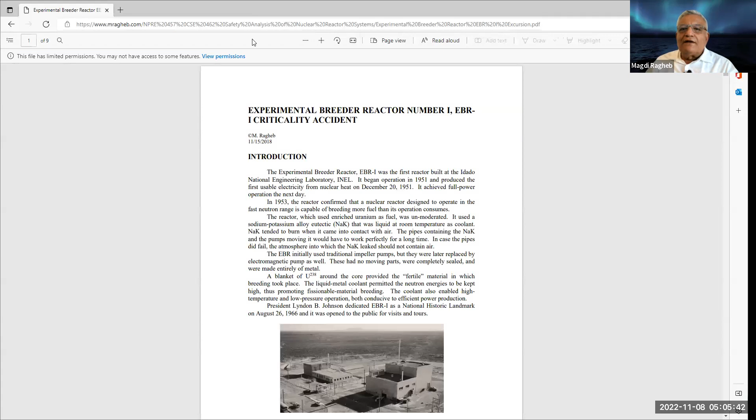And the first accident that the nuclear industry had to deal with was the Experimental Breeder Reactor Number 1. So this is the first description. Actually, that accident that happened in the Experimental Breeder Reactor Number 1 was intentional, because they generated the accident intentionally so that they could learn about how a fast reactor would operate. And historically, the interesting thing is that the Experimental Breeder Reactor Number 1 was the first reactor to operate in the United States. It was built in the desert around Idaho Falls.

Our TA was at Idaho Falls last summer. Idaho Falls is the Idaho National Engineering Laboratory. It is a lab in charge of the safety aspects of nuclear, not just operating power plants, but also naval reactors. So they run experiments in the desert there of Idaho. Right now, that EBR-1 reactor is a museum that you could visit on your way out west, maybe on a trip over the summer. Don't travel in that area during the winter. It's a very, very dangerous area in that case.

It produced electrical power for the first time from nuclear energy on December 20th, 1951. And in 1953, it confirmed that a reactor built to operate in the fast neutron range is capable of breeding more fuel than its operation consumes.

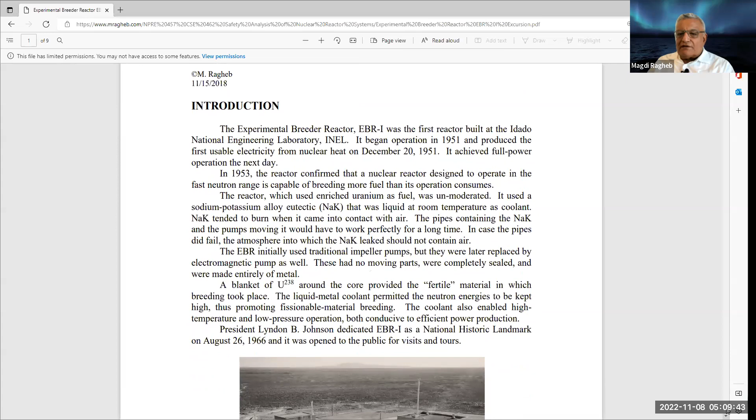Why a liquid metal? Because when you use a liquid metal, the moderation of the neutrons is not as efficient as when you use water, like in light water reactors, PWR and BWR, or in graphite, carbon-12. Sodium and potassium are not very good moderators, so the neutrons remain fast, around the kilo electron volt range. They're born at 2 million electron volts. In thermal reactors — light water cooled, heavy water cooled, or graphite moderated — we slow their energy all the way down to 0.025 electron volt.

Modern liquid metal fast breeder reactors have been designed to use sodium as a coolant. Sodium is highly reactive with air and with water. If you have any contact between the coolant water and the sodium, you get a fire — same as lithium in lithium-ion batteries causing fires in existing electric vehicles.

So in that case, they use the eutectic. What is a eutectic? It's an alloy of one or two elements that has the lowest melting temperature. Whereas sodium at room temperature would be a solid, and you have to heat it to turn it into a liquid, the sodium-potassium alloy is liquid at room temperature as a coolant.

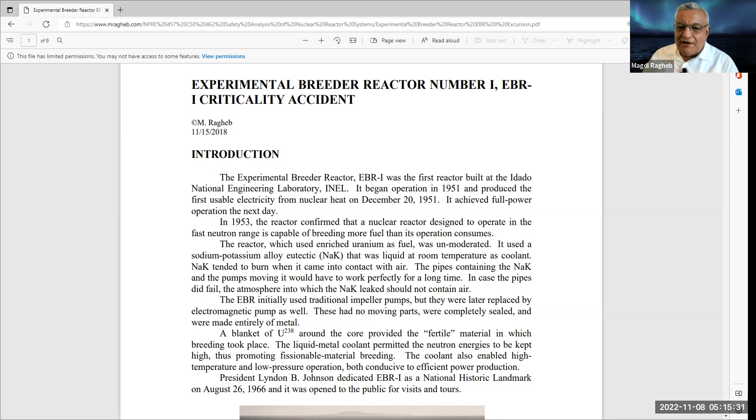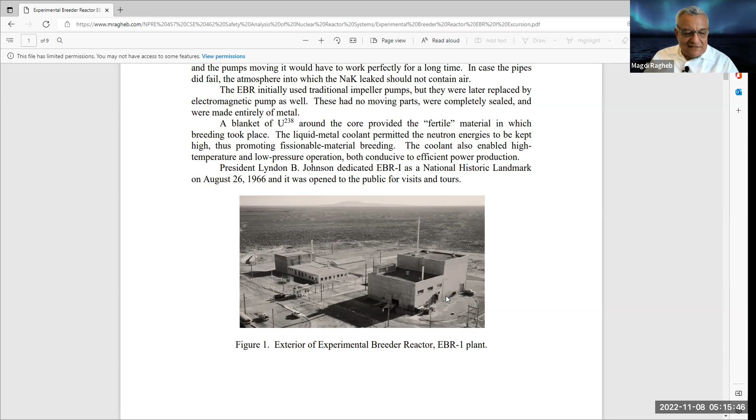It also used magnetohydrodynamic pumps. Here is a picture of the EBR1 plant in the desert of Idaho. You can see it's out in a big desert. On your way west, it's a museum now, no longer operational, but it proved for the first time that you can produce energy from nuclear processes. The first nuclear energy produced in the United States was done here. They lit up light bulbs from the electricity produced by the EBR1 plant.

The Experimental Breeder Reactor Number 1 at Idaho Falls was followed by another reactor that used sodium as a coolant instead of the sodium-potassium eutectic, aptly named EBR2, Experimental Breeder Reactor Number 2. It was a fast reactor that operated successfully for 20 years before being retired, and it supplied the city of Idaho Falls with nuclear electricity. It was very well designed, and I had the pleasure of walking on top of it while it was in operation, which means it was very well shielded.

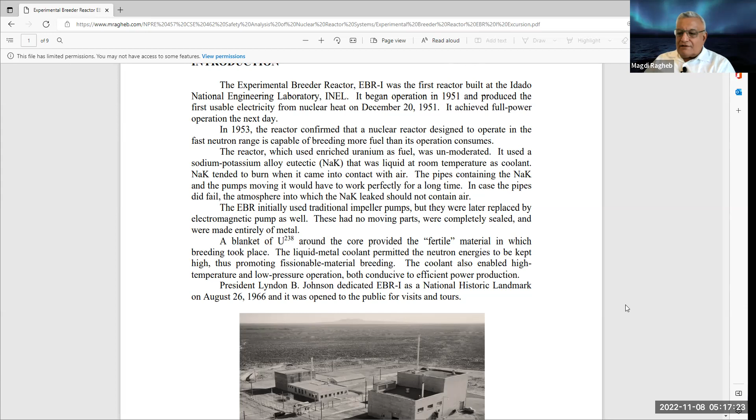Nevertheless, that was the first reactor to produce nuclear energy in the United States — not in the world, because the British had run a reactor before that at Calder Hall. The first nuclear energy was produced in the UK, not the United States, but EBR1 was the second. It was declared a National Historic Landmark in 1966 and is open for public visits.

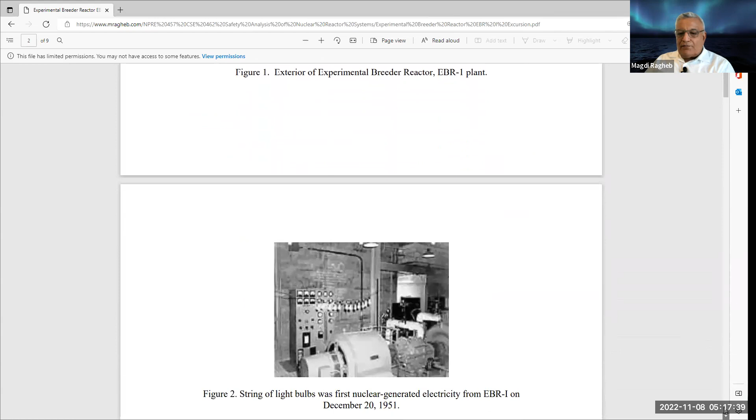The reactor was used to explore what happens when there is a transient or an increase in the power of a fast reactor. Let me quickly show you how that reactor looked.

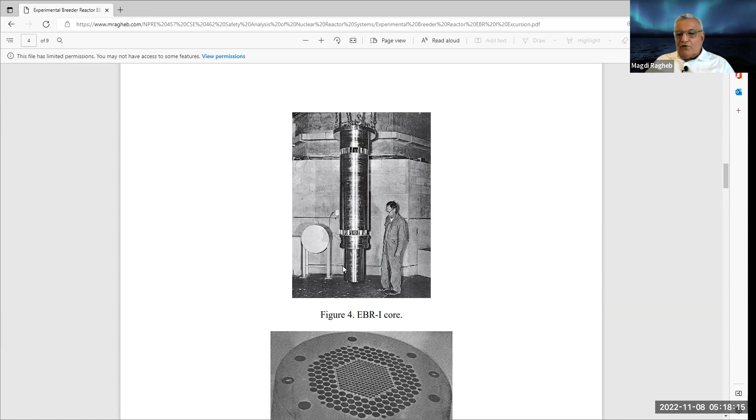This is an actual picture of the EBR1 core. It was a long cylinder with control rods in the core, seen here from the top. It was very small — the reactor itself was about the size of a football, enclosed here. This is the perspective of the core.

You had fuel elements in the center, surrounded by what's called the blanket. That blanket contains rods of uranium-238. The neutrons produced in the core interact with the uranium-238 in the blanket, giving us a chain of interesting reactions. A neutron interacts with uranium-238.

Uranium has atomic number 92. This interaction produces uranium-239, still with 92 protons. I want you to try to write down these equations because they are the secret of the nuclear age in terms of breeding. Uranium-239 is unstable: it emits a negative electron and an anti-neutrino, and to balance the equation it turns into element 93, which is neptunium, named after Neptune, the Roman god of the sea. This gives us neptunium-239.

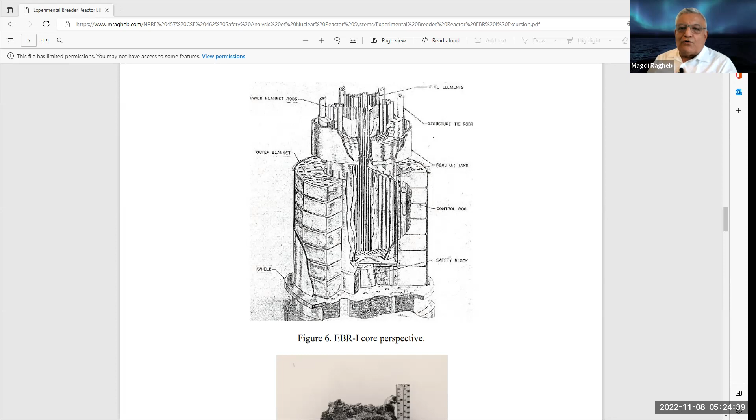So in that case, you could see it had a core in the center surrounded by a blanket. This is typical of fast reactors, where leaking neutrons are intercepted by uranium-238, producing uranium-239. The core would be here — actually they had an inner blanket, with the core right there in the center. As I suggested, they imposed some kind of transients on it to study the behavior of fast neutrons so they could learn how to build them.

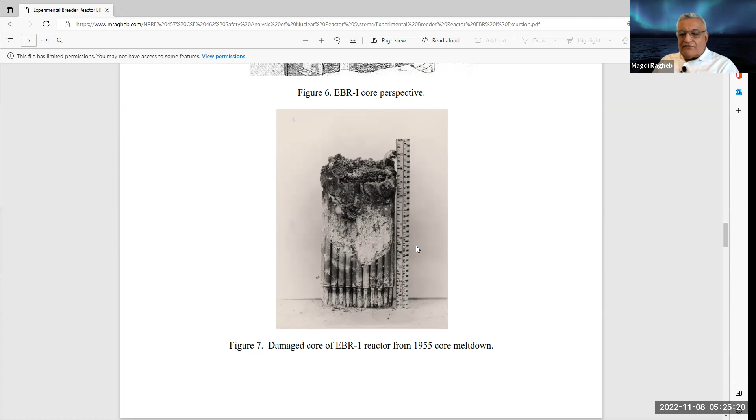And they caused it intentionally to get into an accident. So the core shown here, this part in the center, you could see that it literally burned — it melted, and the core is no longer than a little ruler, maybe a foot in length, almost the size of a football, a bit more. You could see the rods here; they had some spacers between the rods, and basically it was a core meltdown if we characterize it as an accident.

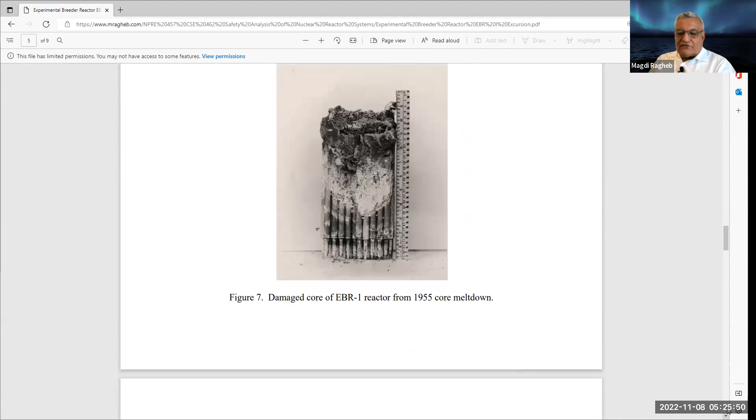So we had the core here in the center with the internal blanket rods, and then outer blanket rods on the outside. It was a successful reactor — it produced electricity, but it was very small in size. The core would be that part here with a steel cap on top. It was destroyed and then replaced another time. This is a more detailed replacement core configuration with a new core. Again, they wanted to learn how to build fast reactors.

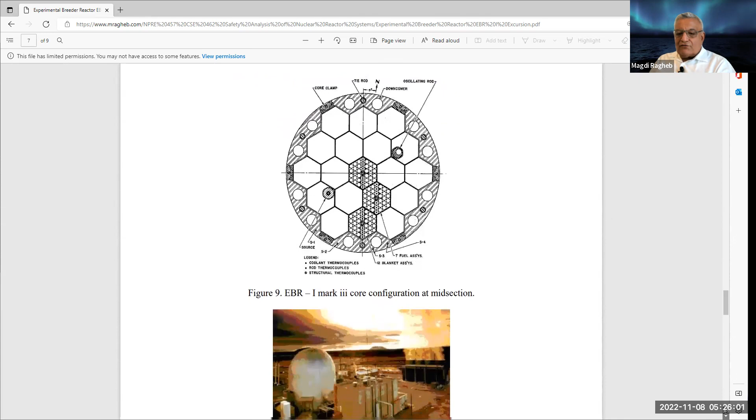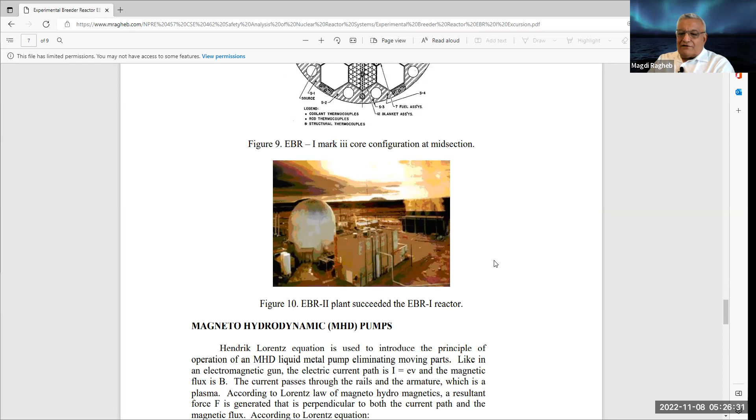And it was followed, as I suggested, with the EBR-2 plant that operated for 30 years, producing electricity for the city of Idaho Falls. So the innovation was there — there are 3 innovations in the first reactor ever built: the use of the sodium-potassium alloy, the breeding, and of course the use of magneto-hydrodynamic pumps.

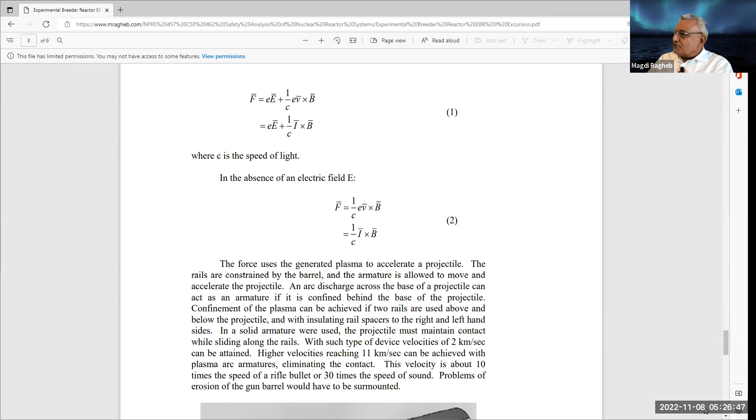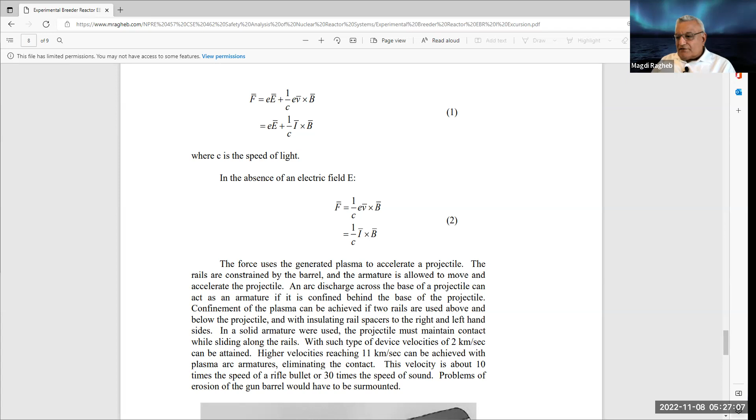That should be the way we use electromagnetic pumps in future reactors rather than impeller pumps, since impeller pumps would be very hard to use for moving a liquid metal. Instead, you can move it by the Lorentz force. The French call that equation the Laplace equation rather than the Lorentz equation. It's rewritten here again — basically, if you don't have the electric field, the force now is just the force from the magnetic field. It's the same idea used in what they call a rail gun, or the magnetohydrodynamic gun, as a matter of fact.

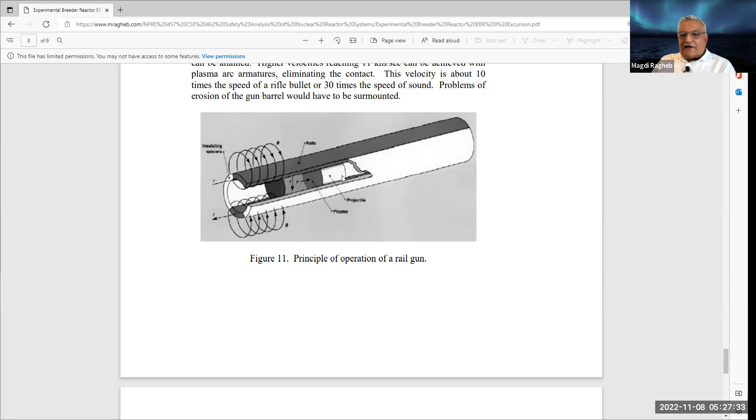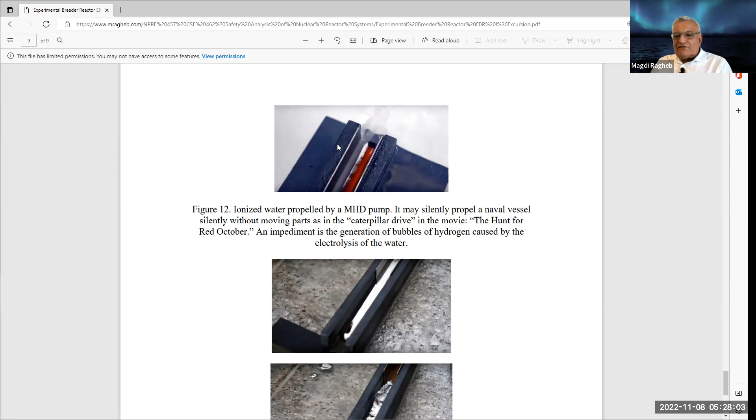And this is an experiment that shows us that this magnetohydrodynamic force would work in water. Water from the faucet contains some salt, so it will conduct electricity. So what they did is show us a small experiment: water that is ionized being propelled by an electromagnetic pump. You would have a magnet on this side, and an electric field from the metal here. You can see the experiment on YouTube, for example.

You could see that the water, or the liquid metal, or mercury, any metal, would start flowing without having any moving parts, only the force from the magnetic field and the electromagnetic field when you have perpendicular electric and magnetic fields. This would work with any liquid metal.

It is used in foundries, in fact, when you want to move liquid iron. That's what is used rather than impeller pumps, which would melt in the iron. You can also use it for circulating lead. The Russians, in one of the generations of their nuclear submarines, used lead as a coolant, actually a lead-bismuth alloy. It would also move tin, or indium, or any metal of your choice.

So the first experiments were basically the intentional excursion of that EBR-1 reactor, but it proved that we can build those fast reactors. However, the further implementation of the idea of breeding was not adopted.

Instead, the needs for nuclear propulsion for the nuclear navy in the United States and other countries brought in the light water reactor, where light water is a coolant rather than the sodium-potassium alloy.

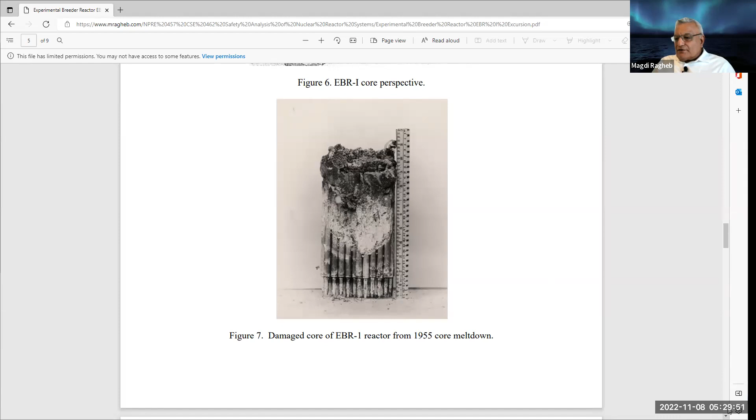I told you that the Russians, in what they call the Alpha class of nuclear submarines, used a lead-bismuth alloy as a coolant. In that case, they had to keep that lead molten at all times, so they had to keep the core heated by steam 24/7. And of course, bismuth and lead are very corrosive.

So at some point they had to abandon the whole idea, and they took the cores of the reactors and dropped them in the Barents Sea, where they are still underwater today. Water is a good shield for radiation. So the first accident that ever happened was intentionally at that EBR-1 reactor.

So let's look very quickly at how the accident happened, or how they proceeded in causing the accident intentionally. This was to facilitate the design of the EBR-2, and it was followed, by the way, by another fast reactor in the United States, named the Fermi Fast Reactor.

It was built around Detroit. The Fermi Fast Reactor itself had its own accident where the core melted down and embedded itself in the concrete below the core. We'll study that accident in more detail later on.

Basically, they were testing whether they could increase the fuel temperature to 500 degrees to see whether it would lose reactivity. Losing reactivity means that at a higher temperature, the resonances that absorb neutrons in the resonance region of uranium-238 would widen and absorb more neutrons. So as temperature increases, neutron absorption increases, and that would shut down the reactor. We call that a negative temperature coefficient of reactivity.

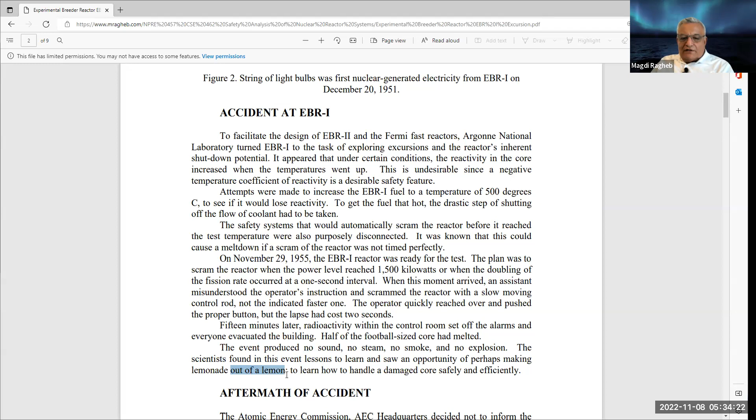The event produced no sound, no steam, no smoke, no explosions. It's just that the radioactivity was released. The scientists found lessons to learn in this event, and saw an opportunity of making lemonade out of a lemon, learning how to handle a damaged core safely and efficiently in general.

As a result of the accident, at the time it was regulated by the Atomic Energy Commission headquarters. They decided not to tell people about the accident. They kept it secret. And so we learned from this that eventually you cannot keep those secrets.

The news leaked a year later, in 1956, covered by the nuclear and national press. The editor of a magazine at the time called Nucleonics warned the Atomic Energy Commission, the AEC, that nuclear accidents were public business. He said, quote, apart from the bad effect that secrecy would have on attitudes toward nuclear safety, such withholding of news is wrong in principle.

It is beyond the authority of the AEC to withhold information not affecting national security. And because the AEC operates in so much secrecy, public confidence in it will surely be undermined. And indeed, it was undermined in general.

Analysis found that under the influence of high heat, the fuel elements had bowed and expanded. So basically the fuel elements expanded, touched each other, the coolant was obstructed, and it led to a positive feedback effect, creating more damage.

The heat had been greater on one side of the elements than the other. And since the fuel was clamped at both ends, it simply bowed. It bent and touched each other.

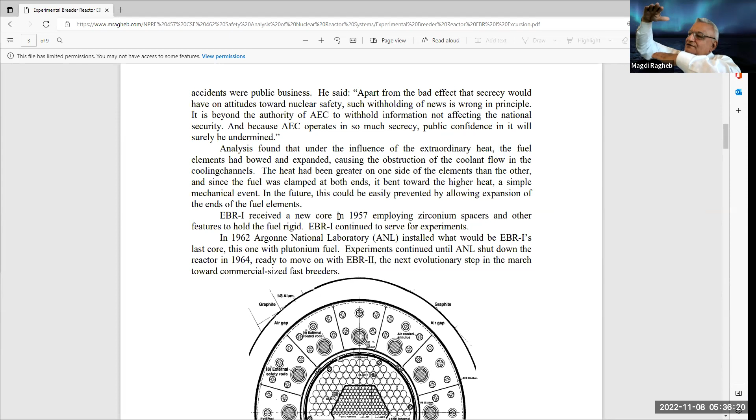From that simple mechanical event, the lesson for the future is that if you design a fast reactor, you must make the ends able to expand. If you keep them clamped together, they will bow, and as they bow, they stop the coolant flow, and the temperature would compromise the system in general.

The Argonne National Laboratory installed what would be named the EBR-1's last core. This one used plutonium fuel, so it was used really for experimentation, learning about different fuels and different breeding, and so on.

They moved with the EBR2 design, the successor of EBR1, which was the next evolutionary step in the march towards commercial-size fast breeders.

Unfortunately, the fast breeder was not adopted by the United States. It was adopted by the French, who built the Phénix #1 and the Superphénix #2 based on the same design as EBR2. In the United States, the design was given to the Westinghouse company, so they tried to use the same technology as in light water reactors, with lots of piping instead of cooling the whole core in a pool of sodium.

The French did it right, like EBR2. The Americans were criticized by the engineering profession, and the fast reactor that was named the Clinch River Reactor, which was to be cooled by water from the Clinch River near Oak Ridge, Tennessee, was never built.

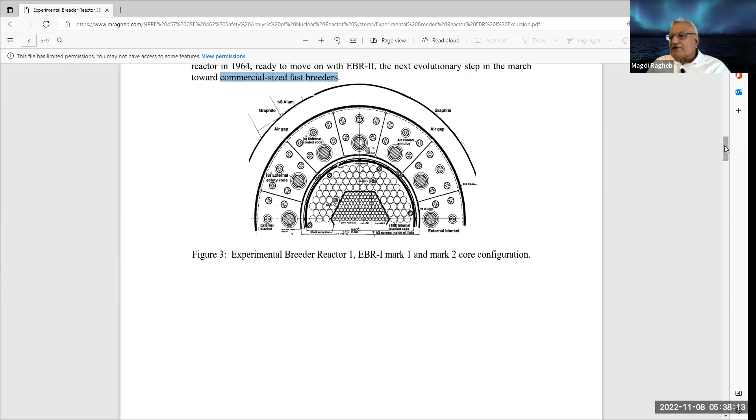The French acquired experience on fast reactors, and indeed in the Superphénix #2, the French also achieved breeding at 20% above, a 1.2 breeding ratio. The idea of breeding is the future of nuclear energy, the vision where scientists and engineers are interested in nuclear energy.

It provides us with basically a practically unlimited supply of energy. Today, we are still burning uranium-235 because it's very widely available and very cheap, and in that case we haven't jumped yet into the breeding range.

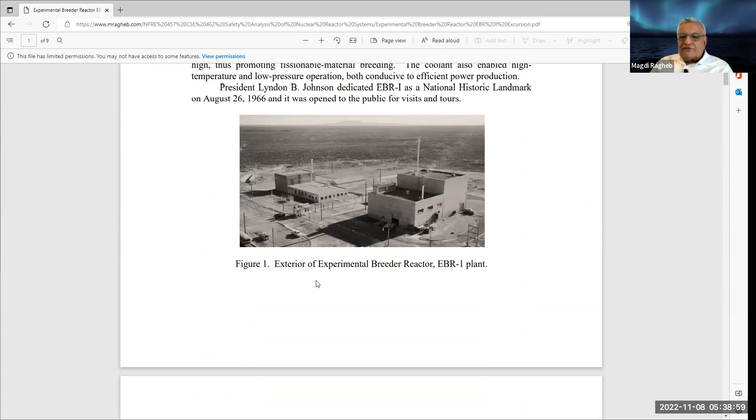The first knowledge about it came to us from that famous EBR1 reactor. And that's the history of the EBR1 reactor in general. All right, so that was the Experimental Breeder Reactor number 1.

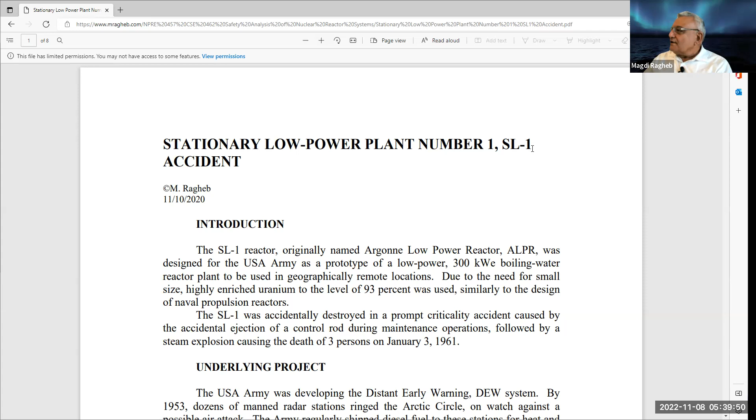We want to study another accident that happened also in the Idaho Falls desert. At the beginning, nuclear energy was used by the military. The United States Navy built a reactor for naval propulsion, and the United States Army also thought, let us also build a nuclear reactor. So the Army built what was called the Stationary Low Power Plant number 1, designated SL1. It was built after the EBR1 accident, in the same desert of Idaho Falls, and was meant to be a military reactor for remote locations.

It was a small power reactor, so SL here stands for stationary low power. It was only 300 kilowatts electric. They used boiling water, so it was a boiling water reactor, meant for geographically remote locations, like radar sites trying to intercept ICBMs.

Coming from the side of Russia, they had to build these radars in the northern parts of Canada, far from civilization. Getting diesel fuel there to produce electricity would have been very expensive, so they started building small reactors in general. Because it had to be at a remote location, it had to be small in size.

They used highly enriched uranium, enriched to 93%. That level gives you a very compact reactor and also allows you to run it for 10 to 15 years without refueling. In fact, that 93% enrichment is used in naval reactors. Land-based reactors are allowed only an enrichment of 3 to 5%, on an arbitrary basis, because the International Atomic Energy Agency allows countries to use up to 20% enrichment in uranium-235 for research reactors in general.

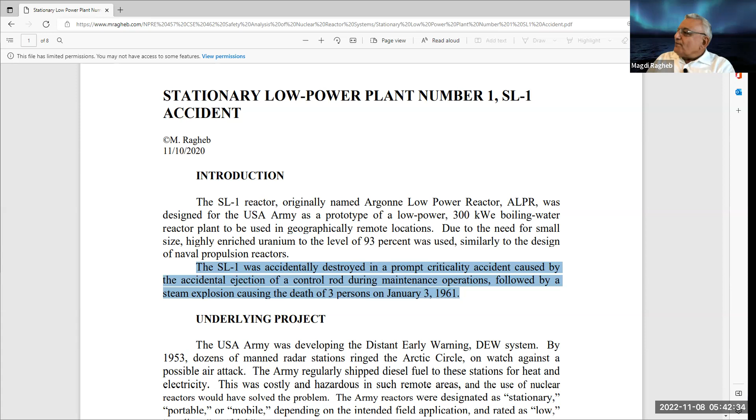There are two other causes prominent in accident situations. Other than human error, you'll find that equipment failures take a role, and the third element is design flaws. We have to be cognizant of all three of them.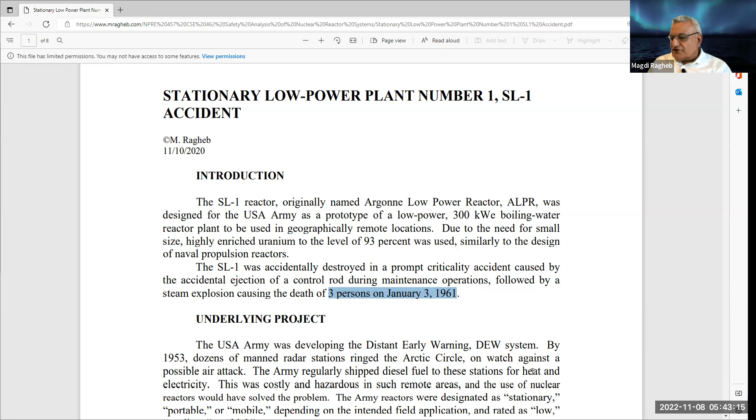This accident happened while they were performing maintenance on the control rods, around the time of Christmas, a very cold time in the desert of Idaho Falls. It happened while a crew was trying to perform maintenance on one of the control rods. It led to the deaths of 3 persons in January 1961, about 5 or 6 years after EBR-1, but in the same kind of location.

So why did they build those small reactors, SL1, SL2 and so on? It was meant for the distant early warning system—dozens of manned radar systems around the Arctic Circle on watch against a possible attack from Russia with ICBMs. You want to detect them upon launch, because then you can intercept them. When they come back at you, they descend from space at several times the speed of sound, so you'd need interceptors that are hypersonic. You can't do it, so your best bet is to intercept them upon launch rather than upon re-entry.

So the Army reactor was designated as stationary, portable, or mobile, depending on the intended field application, and they rated them as low—that's the L in SL1—medium, or high power.

They thought they could build a 3 to 4 part power plant that can fit into cargo planes, take them to the location, even in Greenland, and assemble them together to generate a small amount of power. 1 megawatt thermal would be enough for a radar station in that case.

It was hoped that ordinary air could be used as a gaseous coolant in the gas-cooled reactor experiment. Later, they replaced it with nitrogen as a coolant. And the mobile low-power reactor was designated not as SL1, but ML-1. They investigated it too, but all these projects did not come to fruition on a large scale.

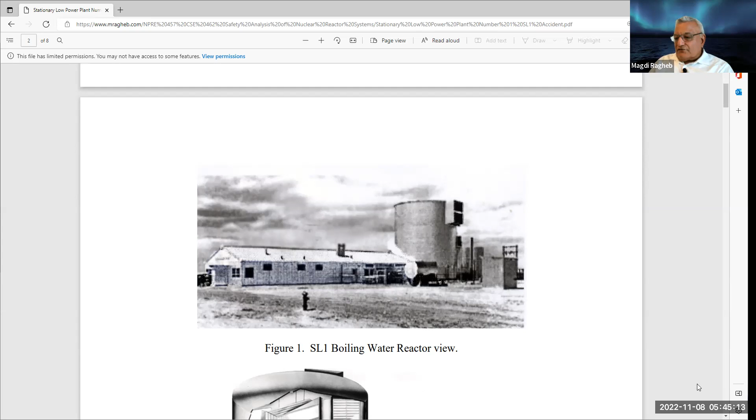This is a picture of the SL1 reactor in the desert of Idaho Falls around winter, as you can see. It was a boiling water reactor with control rods. Usually in boiling water reactors, control rods come in from the bottom, but in that case, they came in from the top.

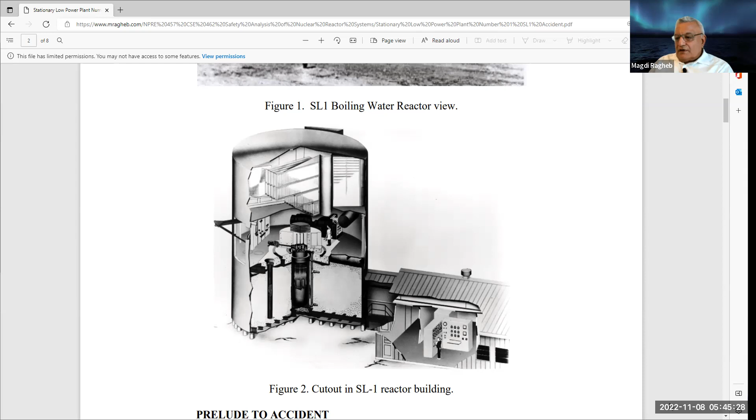They had a crew that had to check one of the control rods. As they were trying to pull the control rod, it had some kind of friction. One of the people pulling the control rod yanked it out violently, beyond the limit you can move a control rod out of the core, making it super critical. So the system became super critical.

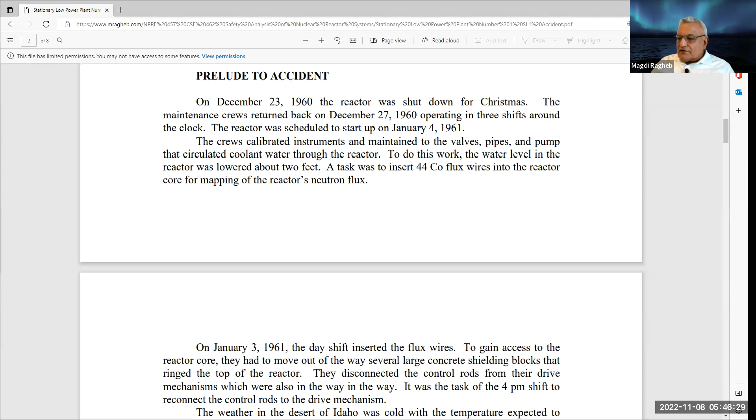The energy release was monumentally large. It boiled the water, and the water formed a piston. The piston rose up and threw the control rods up to the ceiling. Unfortunately, one of the control rods impaled one of the workers into the ceiling, and the radiation level killed 2 other persons in the accident. So that was one of the first accidents that caused death in learning about nuclear reactors.

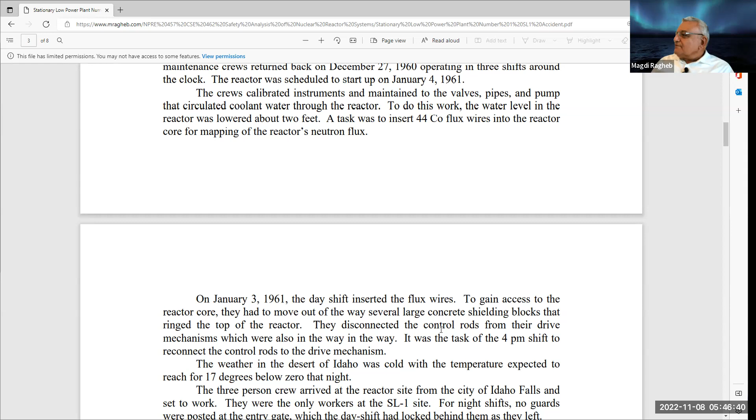Interestingly, if you go back to our description of the phenomenology of steam explosions, that was a description of what happened in the SL1 reactor. So what were they doing? Look here at the diagram of the reactor.

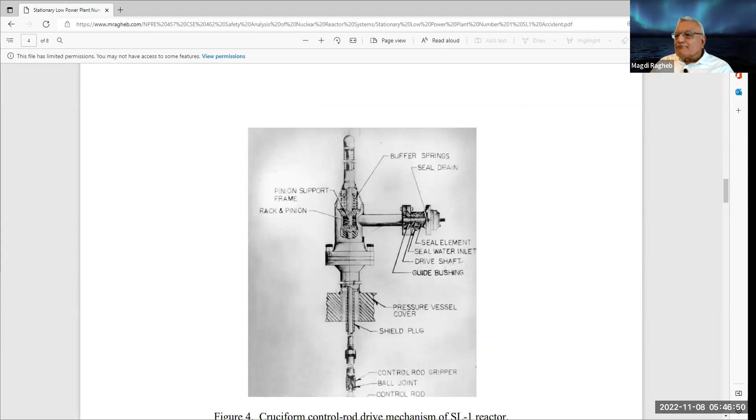What they were doing was simply pulling the connections to the control rods at the top so they could replace some of the components of the control rod. The control rod was driven by a drive motor right there, so they had to take off everything on top and keep the coolant in the reactor core.

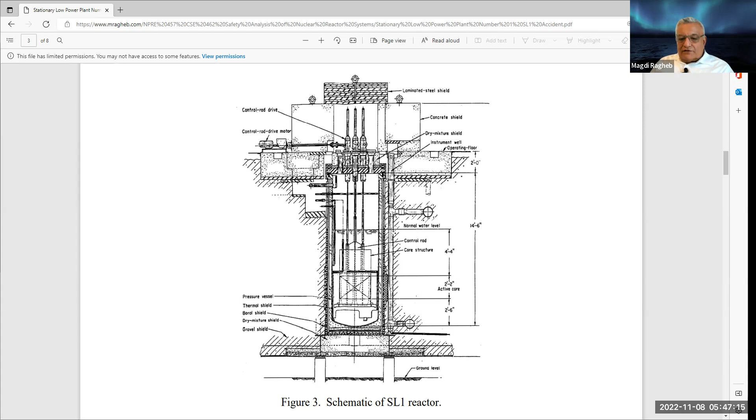They started working on one of the connections of the control rods that came in from the top. This is the control rod mechanism—it was cruciform, meaning in the shape of a cross, like existing boiling water reactors.

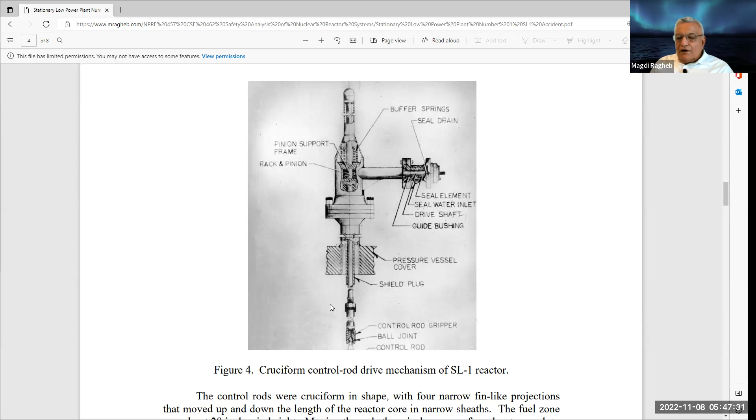Unfortunately, it ended up with a human error. The control rod seemed to stick slightly, perhaps because other items in the reactor core had bowed, same as the EBR1, invading the clearance spaces and placing pressure on the sheath.

The 3 crew members entered the reactor at 9 p.m. They did it at night, 2 of them directly over or very close to the top of the reactor, working with a central control rod. At 9:01 p.m., something happened causing the reactor power to go prompt critical.

So we have 2 accidents where the criticality became prompt critical. Prompt means the fission process happened with prompt neutrons—neutrons generated directly from the fission process. Delayed neutrons are generated from the decay of fission products, and in that case we have a longer time, allowing us to do some control. Prompt criticality can happen within microseconds, so the power increases exponentially, really fast.

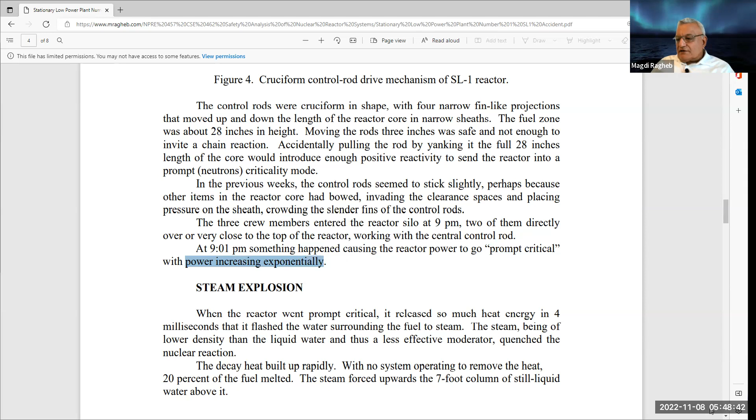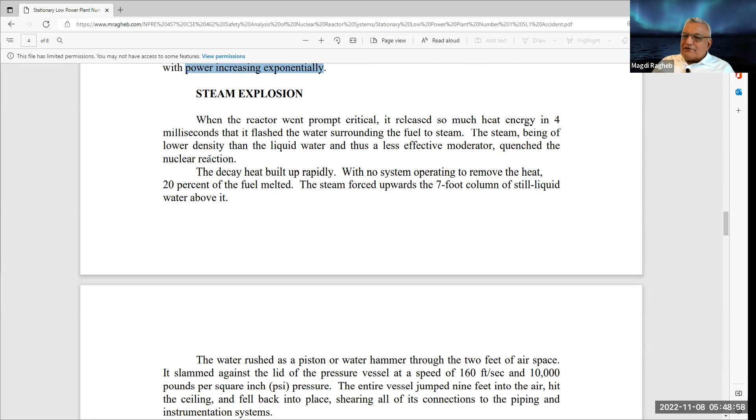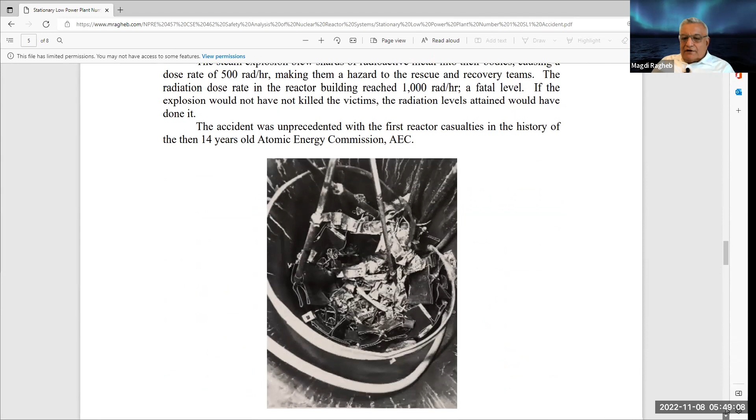When the power was released on a fast scale, it caused a steam explosion, for which we wrote the balance equations in the previous chapter describing the phenomenology of steam explosions. The explosion was so serious that it basically threw out the whole top of the reactor. Here is a picture taken later showing the destruction and the damaged core of the SL1 accident.

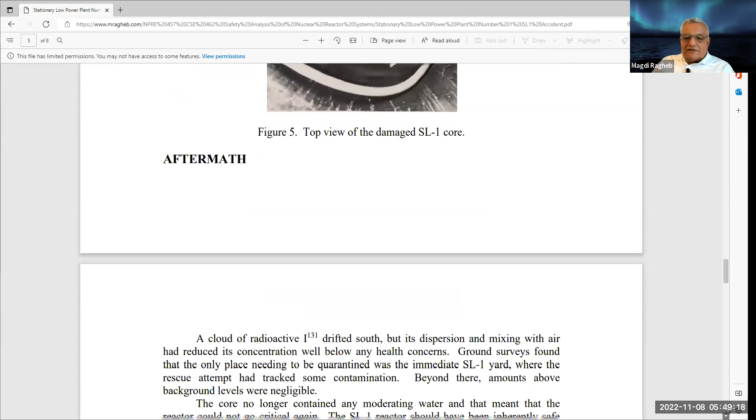Both of these were accidents caused by human error. So we should take human error as a major cause of many of the accidents in the history of nuclear power generation.

As the system exploded, yes?

That's a very interesting aspect of boiling water reactors, because in that case, the very high speed of heat generation totally boiled up the water. Now, what happens if you boil up all the water? You then have no moderation of the neutrons, so the system shuts itself down. The steam explosion ended up shutting down itself, but still the energy was released in an explosive manner.

It was nuclear initially, but it happened so fast that it became chemical. The steam expansion turned it into a steam explosion rather than just a prompt criticality or the fuel itself exploding. Why? Because you disperse the fuel and it becomes subcritical immediately.

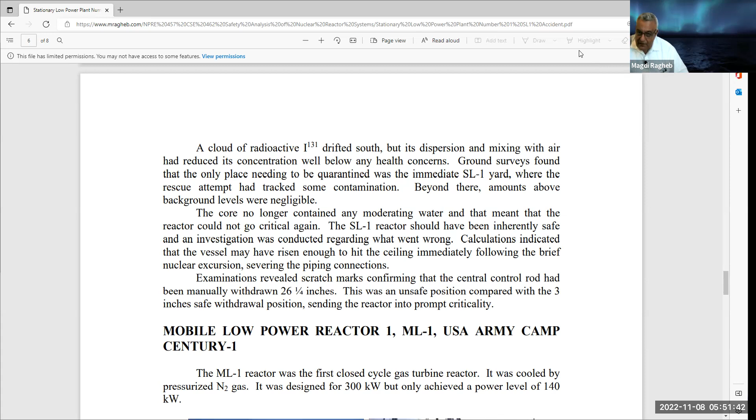The steam now expanding creates a piston, like in the model that we built about it. The steam went to the top, it destroyed all the top and all the components, as you could see here in the barrel. The water is gone, so the fuel is sitting there without a reaction going on anymore.

It cannot become critical anymore as long as you don't add water to it. Prompt criticality comes from neutrons that are born from the fission process when the system is moderating. But if you don't have a moderator, you get a spike and then no moderation anymore, the system shuts itself off. The loss of water, the coolant, shut the system off.

Yeah, and that's true. It was 93% enriched and makes it very compact. This is what the enrichment is in naval reactors. So it was a military reactor, remember, that was a military reactor.

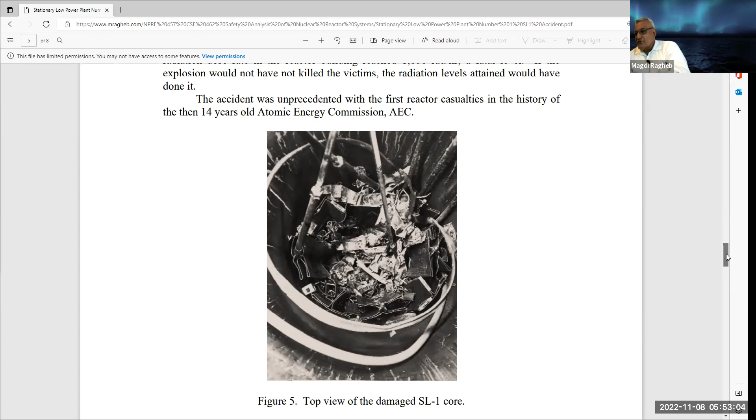When it was moderated, it was prompt criticality. Once you evaporated the water, and the evaporation process itself is a steam explosion, so it's a chemical reaction now. The prompt criticality did not act like a bomb. In a bomb, you need to keep the fuel compressed together. Once you dissociate it, it's not critical anymore.

No, and that's what the Germans thought. Werner Heisenberg thought that the bomb would be very large in size because we needed a moderator. The genius of Enrico Fermi is that he built a fast reactor. Remember, the spheres of uranium-235 and plutonium-239 used in the Nagasaki and Hiroshima bombs didn't have a moderator. They were fast reactors, same as EBR-2 in a way.

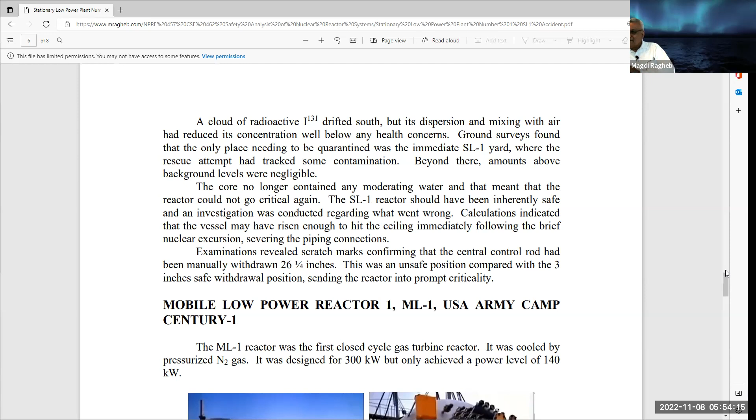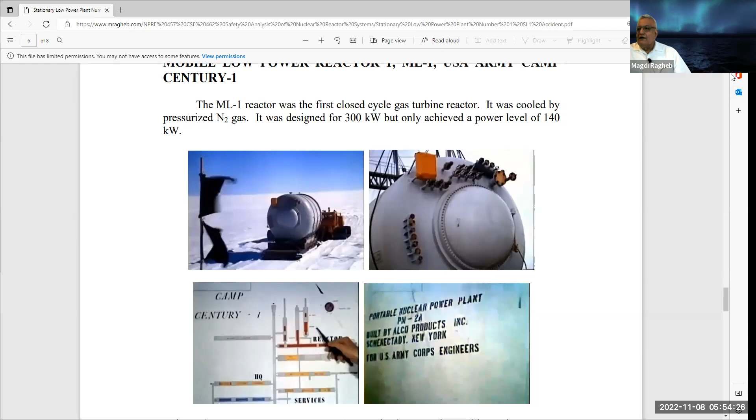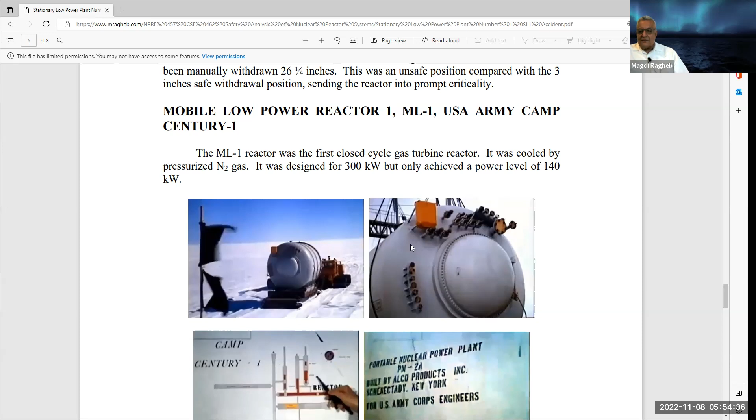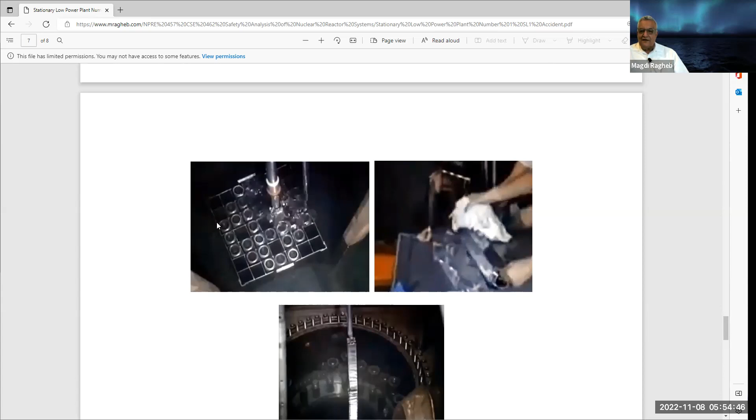Okay, let me very quickly tell you the progression. The Navy continued, the United States Army continued trying to build small reactors, and one of them is a mobile low power reactor number 1. You could see here they built it as different components. This is the pressure vessel there, and they built it in an atmosphere of ice, and it looks very much like a naval reactor, but it used nitrogen as a coolant, air, in fact, because air is 78% nitrogen.

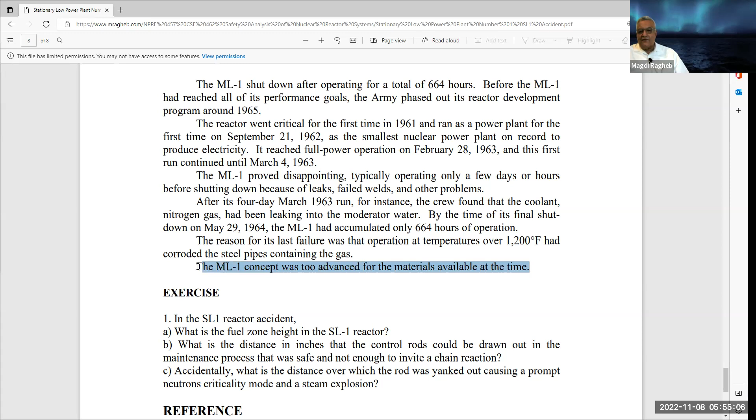It was followed by a reactor they built very close to the White House, really. So the ML1 concept was too advanced for basically the materials that they used at the time. They were not able to use the nitrogen as a coolant. It still remains as an alternate coolant for us as a gas if we don't have enough helium for reactors, and that should be some topic for a thesis research, that we can use air as a coolant.

In the case of the low reactors, SL1 and ML1, basically the system leaked all over the place, and they give you detail about it. The important aspect of today's lecture, the two chapters here, is that in both cases, it was human errors that led to the accident. In the first one, the operator did not push the correct button to insert the correct control rod.

And as we learn about the other accidents, we'll identify what were the causes of these accidents so that, of course, we can avoid them in future designs. And thank you for your attention.

We went a little too far today just to answer the questions. I'll be happy to discuss the topic with you even more if you have time.